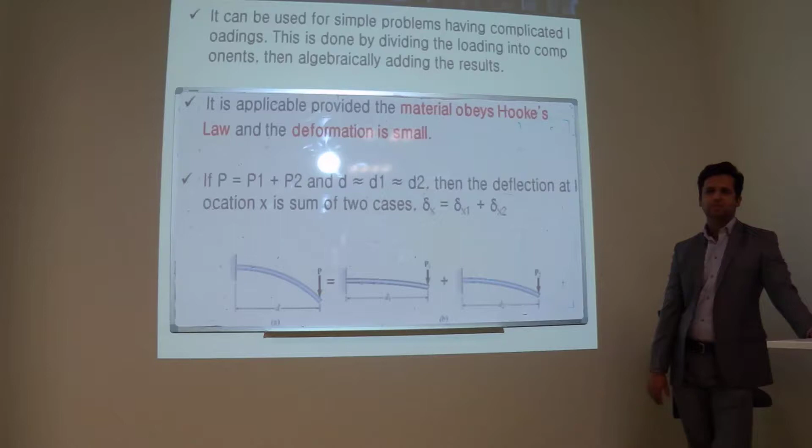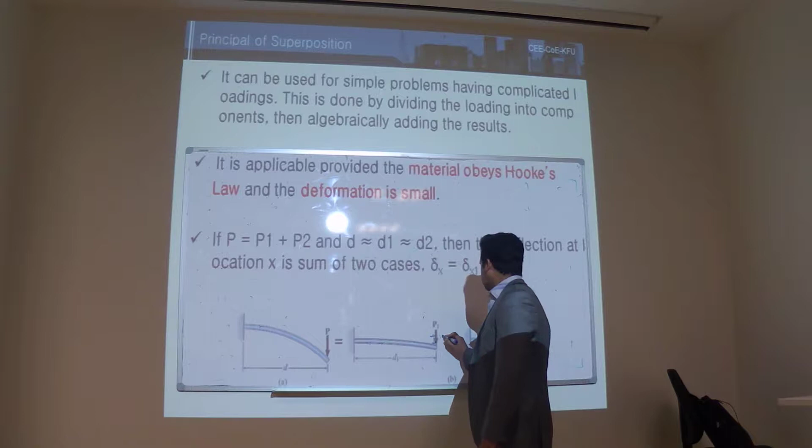For example, now we have a beam, and in this beam there is a load P1. Due to this P1 there is a deflection, and for example this deflection is like 10 mm. Due to this load P2, the deflection is more, like 20 mm.

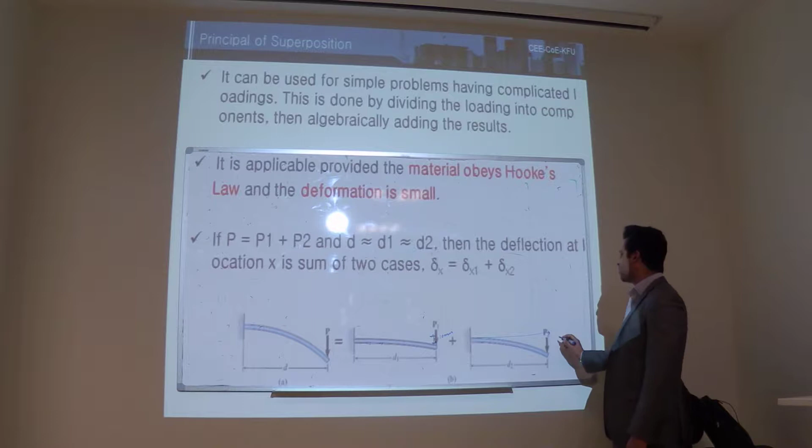So if we want to see the combined effect of these two loads, this load is 10 kilonewton and this load is 20 kilonewton. If you want to see the combined effect, what will be the deflection when P equals 30? According to the principle of superposition, you can add 10 plus 20, which gives 30 millimeter.

The same condition, everything is same. The beam length, span, all other parameters are constant. But for that, there are certain conditions that need to be satisfied.

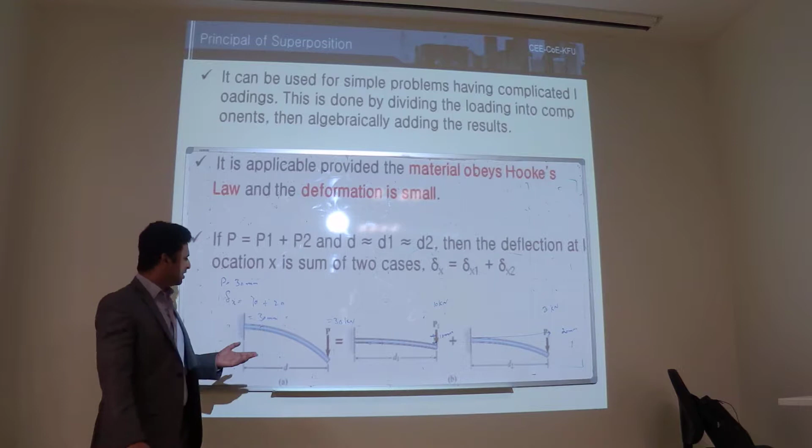For example, this material is an ideal material, like a rubber, like a spring. But in real life, we don't have ideal materials like concrete. You know that concrete is a non-homogeneous or heterogeneous material, so concrete does not obey any Hooke's law.

But what about steel? Does steel obey Hooke's law? Yes and no. In the elastic region, it does. Beyond that, it doesn't. You know that this curve is a stress strain curve for a steel rebar.

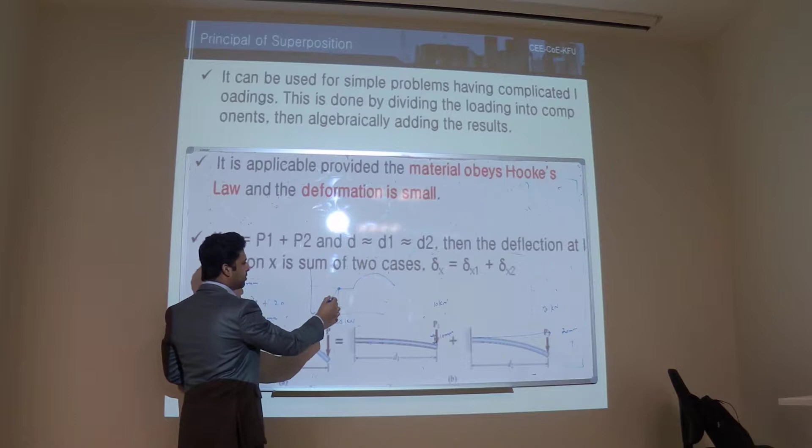Up to this point, if you apply any force or any stress up to this point, and then you remove it, it will go back. It is elastic. So it means that till this point you can use the principle of superposition for steel.

But what about beyond this point? If you apply some force and the stress has gone beyond this point, then its behavior is not elastic. It will not go back to the original shape. It will be deformed, and there will be some permanent or plastic deformation stored in the material. So for superposition to apply, the material should obey Hooke's law.

Luckily or unluckily, in your book there is no problem which discusses non-homogeneous or heterogeneous materials. So maybe you are both lucky and unlucky. That's why it is written in bold and in red that the material obeys Hooke's law and the deformation is small.

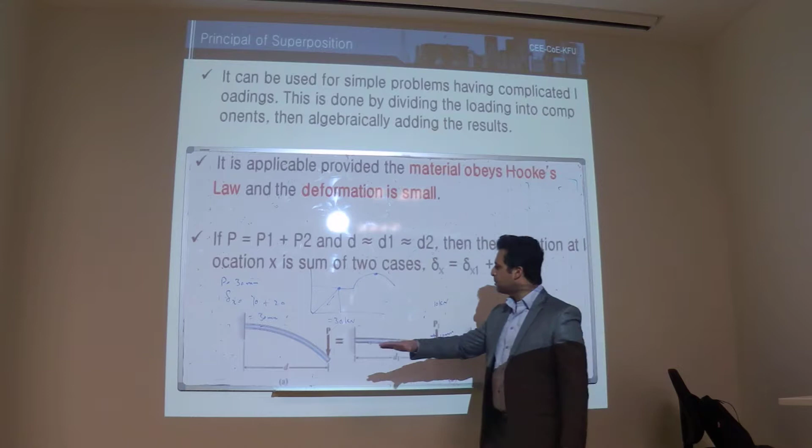If you want to see the combined effect of a load under the same conditions, you can add these two loads to get the total deformation, provided that the material obeys Hooke's law and the deformation is small.

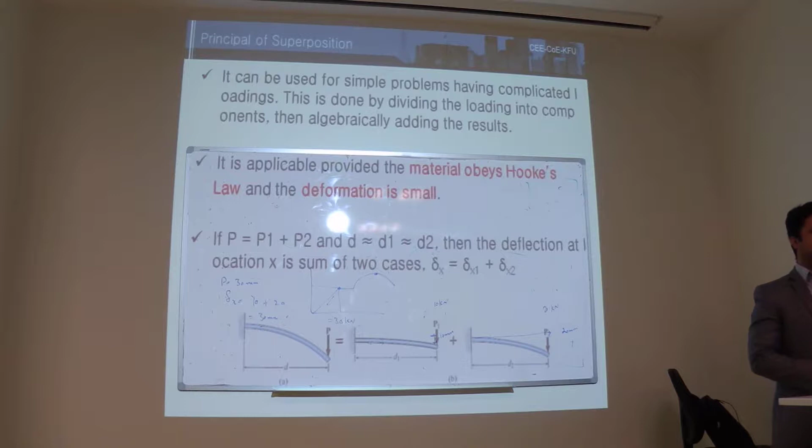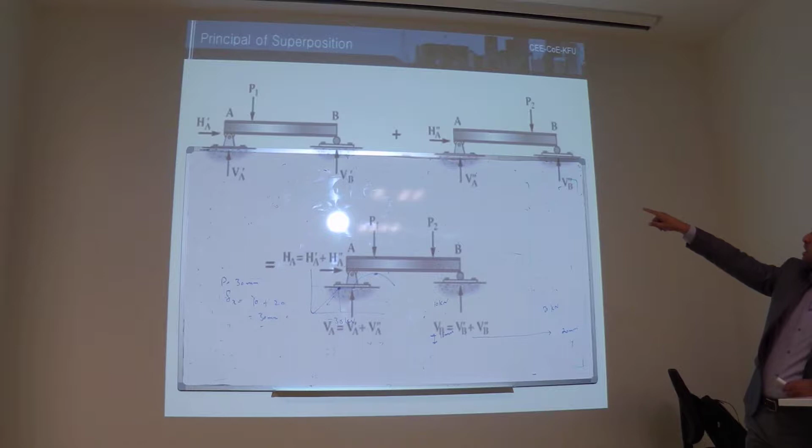The same thing applies in terms of support reactions. For example, if you have two beams, beam on the left and beam on the right, the reaction on the left side is VA prime, HA prime, and the reaction on the right side is VA double prime and HA double prime. If the material obeys Hooke's law and is homogeneous, the combined reaction under P1 and P2 will be the sum of these two. It's very simple.

Do you understand? You can do that with internal loadings too. Let me confuse you a little, am I allowed?

Is stress due to strain, or is strain due to stress? Strain is due to stress. It means that you apply some force and then there is strain.

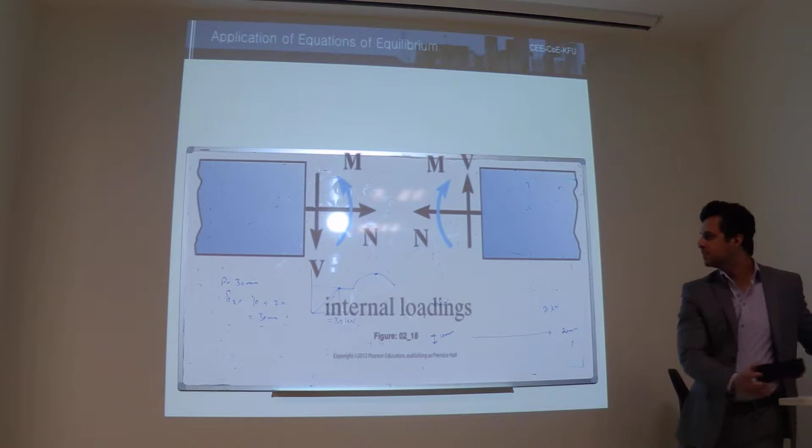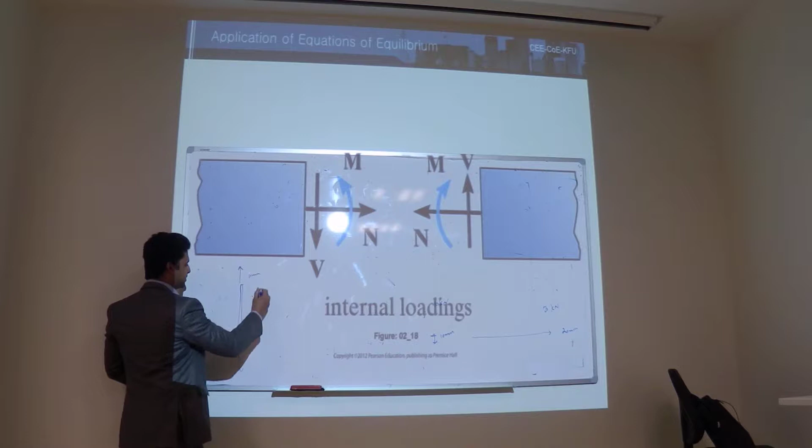Are you sure? Well, if we look at the graph... For example, there is a rebar. You don't apply force, you try to move this rebar 10 mm upward on both sides. So what will happen? It will extend, elongate, and its diameter will shorten.

But what is happening? I mean, do you need some force for that? Yes. So it means that if you apply some force, then there will be some deformation.

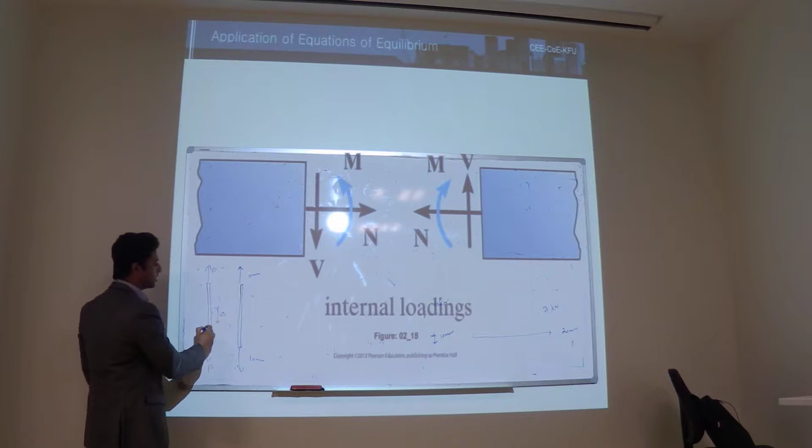So which comes first? Both. You know the stress strain curve you have plotted, maybe in strength of materials or mechanics of solids. One, you apply deformation, and to give that deformation, you need some force. And where is that force coming from, and how much is it? From the stress multiplied by the area.

When you pull any material, what is happening? You are giving deformation, you are not applying force directly. So the material itself tries to resist, and that resistance is known as what?

What is stress? What is the difference between stress and pressure? Area. What is stress? Definition of stress: force over area. And what is the definition of pressure? Same. Then what is the difference? The pressure depends on the area, and the stress depends upon... No. Pressure is a type of stress.

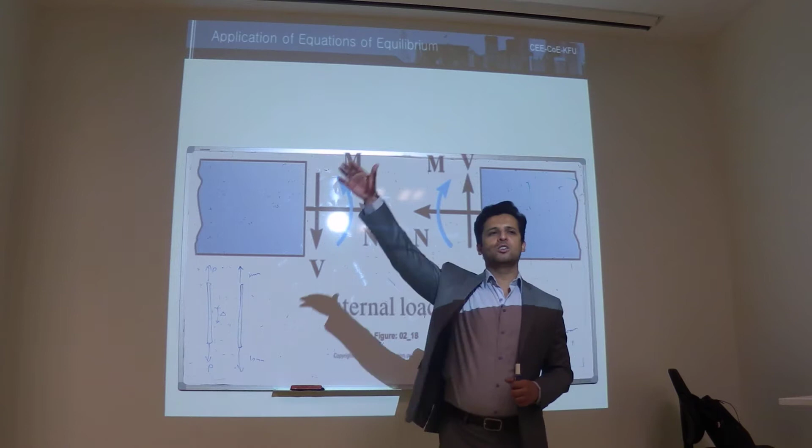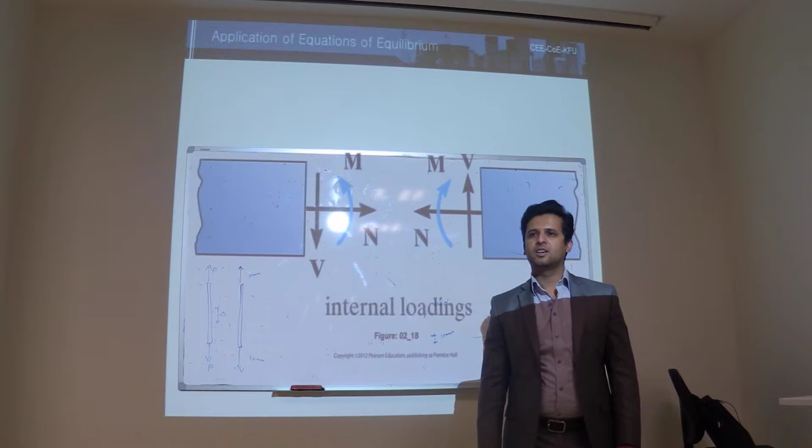For example, someone of you is standing here. I put a load on his head, like 10 kg. So the 10 kg is the applied force. And you are also trying to resist that force upward. That is your resistance. And that is how much? 10 kg upward. Okay? And then I put 20 kg. You will do more, 20 kg. And if I put 100 kg, you're crushed.

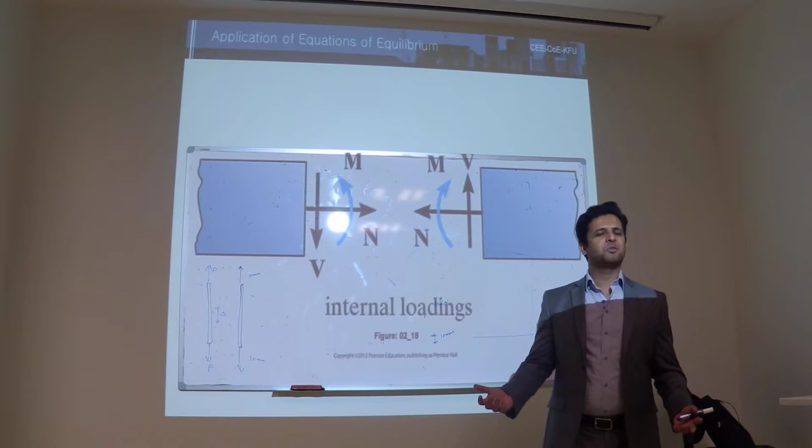Depends on you. You will fall down. I think it's very hard for an average person like me to lift 100 kg. It's very hard, of course. So it means your resistance has gone. So that is the point when stress becomes zero. But the external force is there.

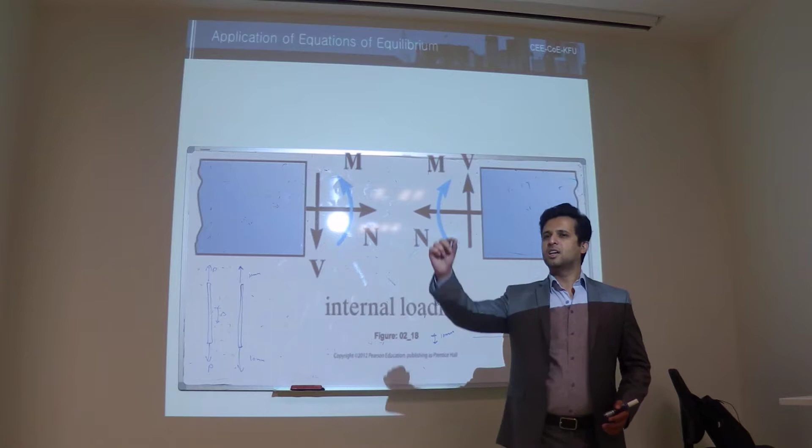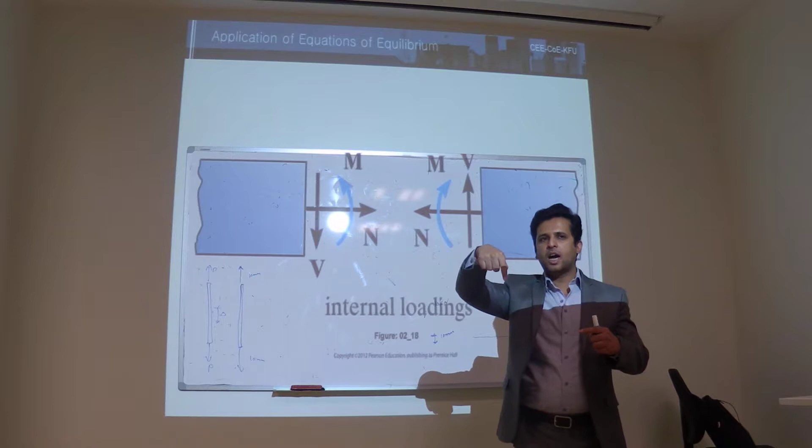The same thing is happening in the structure. When the structure cracks or breaks, you apply some force and the beam breaks down. It means that the internal resistance has gone. Internal stress has gone. Okay? For example, if you see this slide, there is a beam, you apply a force, and due to this force there will be a bending moment here. You know that there will be bending here?

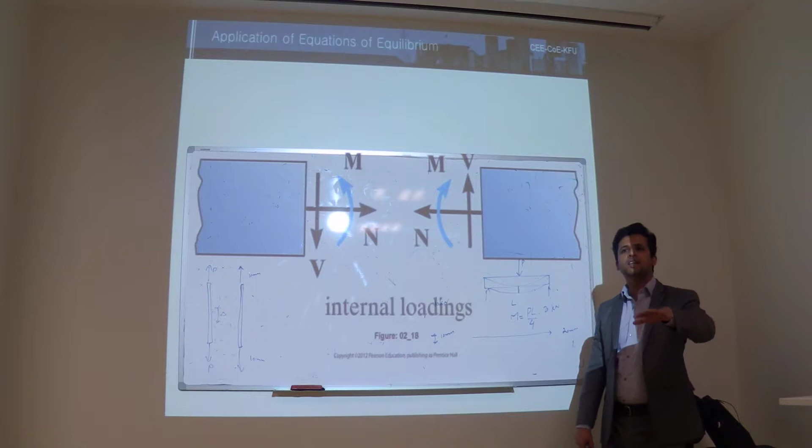So you have two forces. One is the bending here. If L is the length of the beam, how much will be the moment? PL over 4. If L is the total length and the load is in the middle, then this moment is PL over 4. That is the applied moment. And how much is the resistance? Equal, but in the opposite direction. The beam is trying to resist. But if you increase the load greater than the resistance, then it will fail, it will bend.

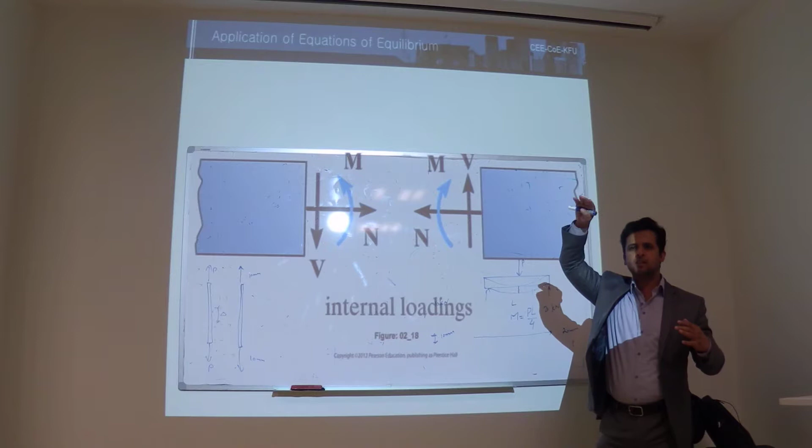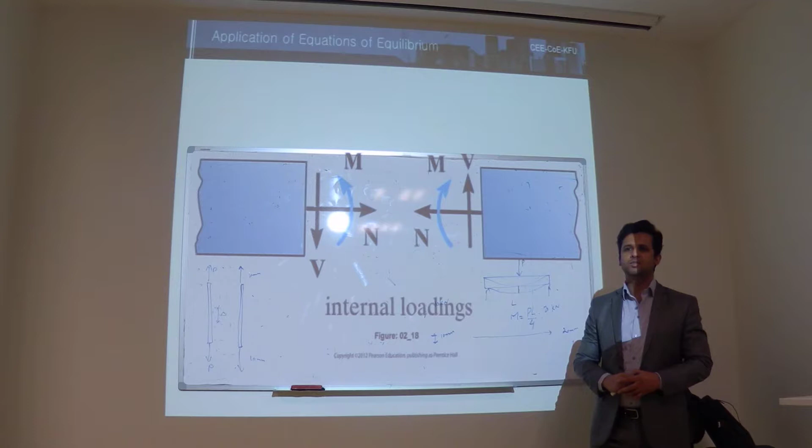The same thing is here. So there is an internal moment. How to calculate that internal moment? Do you know? For steel, you know that. I hope you know that, and you have studied it in strength of materials. You know what is the meaning of strength of materials? This is what I'm saying. Internal. You know this equation?

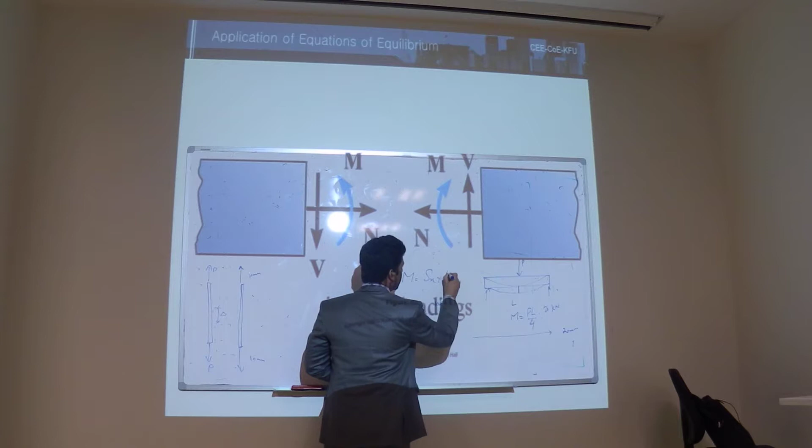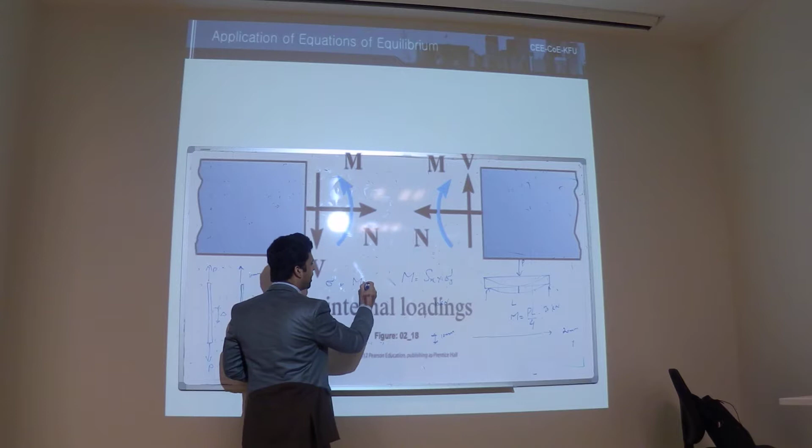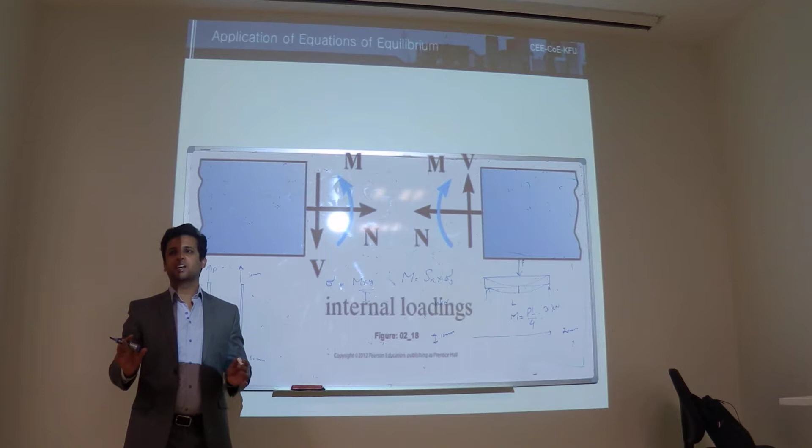M is equal to Sx into sigma y, or sigma? I think you should know this equation. M is equal to, or the bending stress sigma is equal to M into y over I. No. You are lying to me. We know just M equals 0. You have not studied this? No, we reached chapter 4 and 6. If you're saying this, you're lying, because it is the most important equation in the history of structural engineering. Sigma is equal to M into C over I, maybe.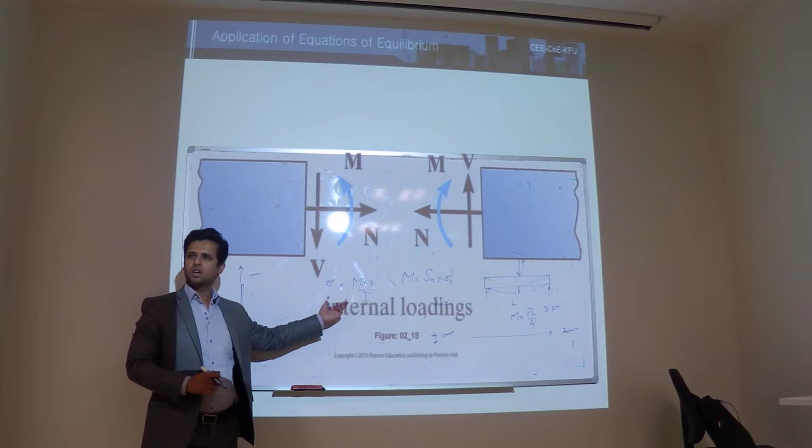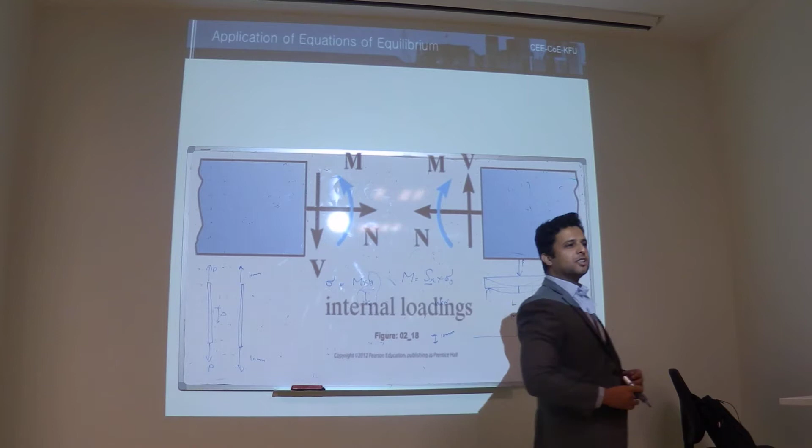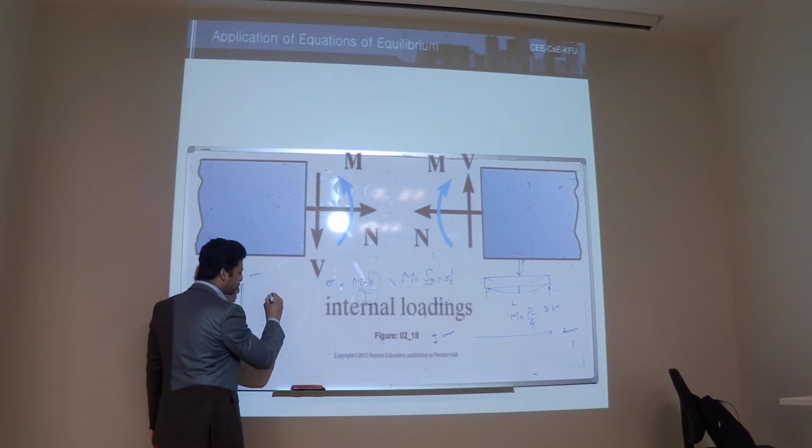Okay, but this equation gives you the bending stress. And what is I over y? I over y is basically Sx, the same equation. Or you can say Ix. I will complain to your teacher. So this is the internal resistance. Okay? In the same way, we have studied the equation for how to calculate the shear stress. What is the equation for shear stress? It's shear force over the area.

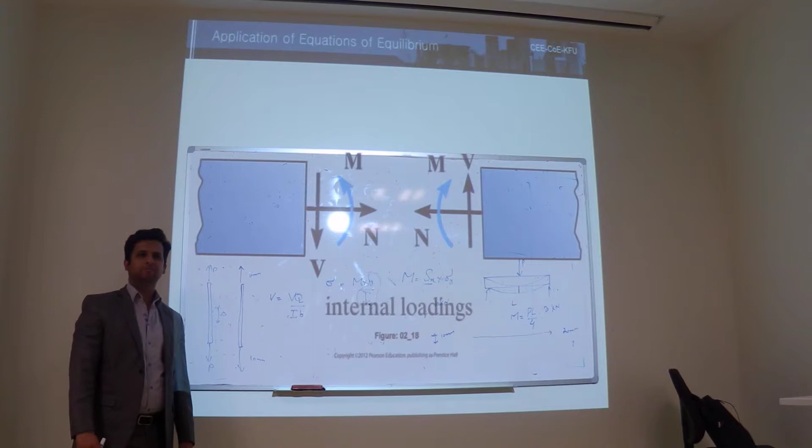VQ over IB. No? What about the torsion? How to calculate the torsional stress? T into R over J.

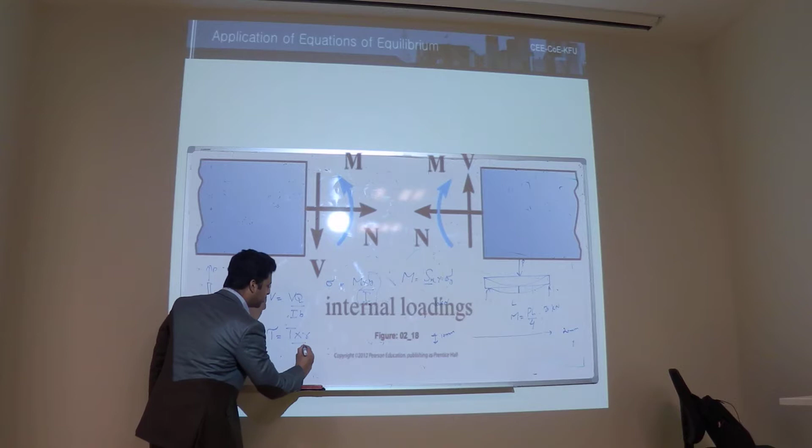No, great. You are in my class, and you are gonna be engineers someday. In the far future. Not so. Well, I'm a little bit surprised, but I don't waste your time.

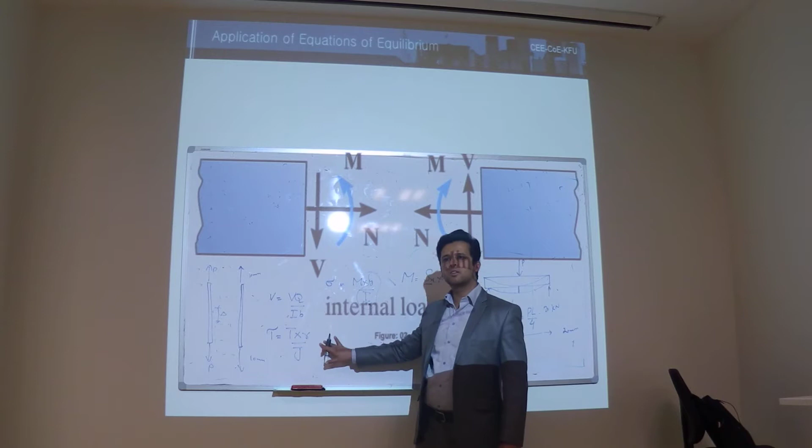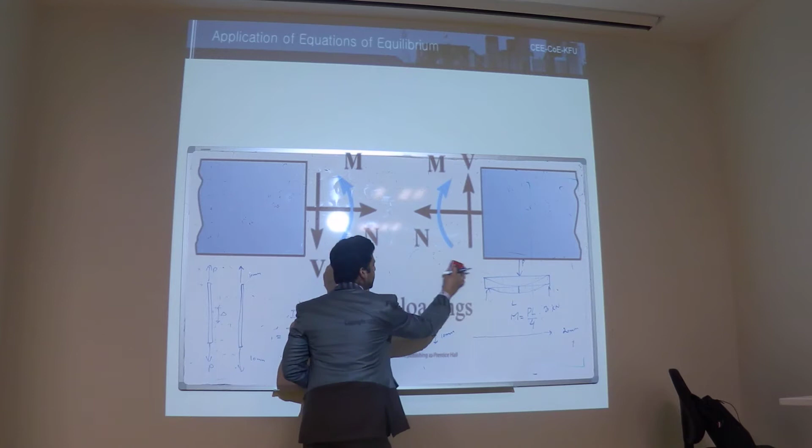Okay, but these are the equations. These equations give you internal forces, internal resistance. This is internal shear. This is the internal moment capacity. For example, for reinforced concrete design, maybe around 5 weeks I take just to teach how to calculate the internal resistance of a concrete beam.

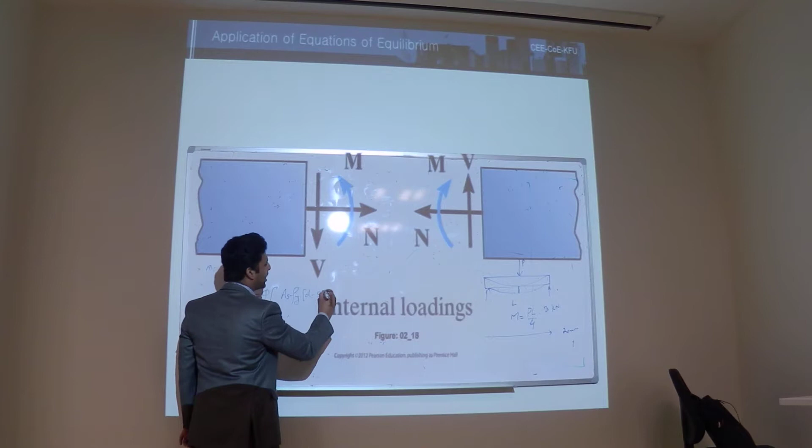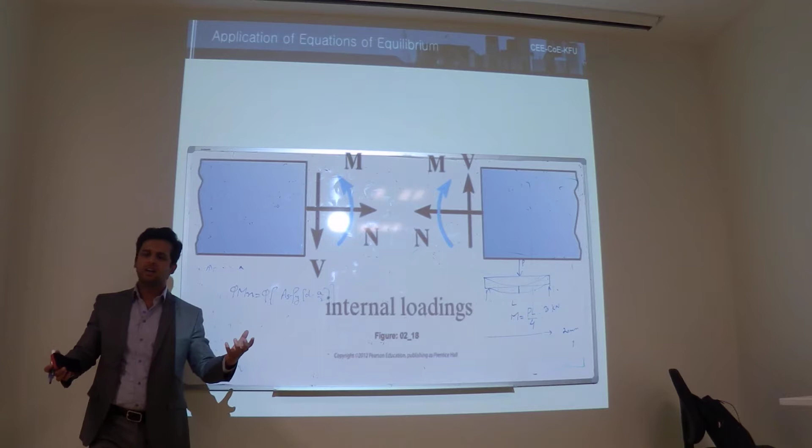The equation is this. This you don't know because it is reinforced concrete design. Half of the semester I take just to tell the capacities of different beams. Okay? Because you know, analysis and design, they are parallel. What is design? I told you, to find out the required sizes. For equilibrium, the applied forces and the resistive forces should be equal.

Do you understand? Which structure will be an economical structure? If the load is like half or less of the resistance. Economical will be that one in which the maximum expected resistance is equal to the maximum possible applied load. Okay, that's MU. If you want to find out the capacity, this is the equation. What is design? Design means to find out the required size or the reinforcement in case of concrete beam.

This is if you know the maximum moment, you can find AS, the area of steel, and if you have AS, you can find out the maximum moment. So this is the same, capacity and design, they are parallel. If you know the size, you can find out the capacity. This is known as capacity analysis. And if you know the required force, you can find out how much should be the size.

If you understand, very good. But if you do not understand, still you can pass this course. Okay? With A grade or maybe A plus.

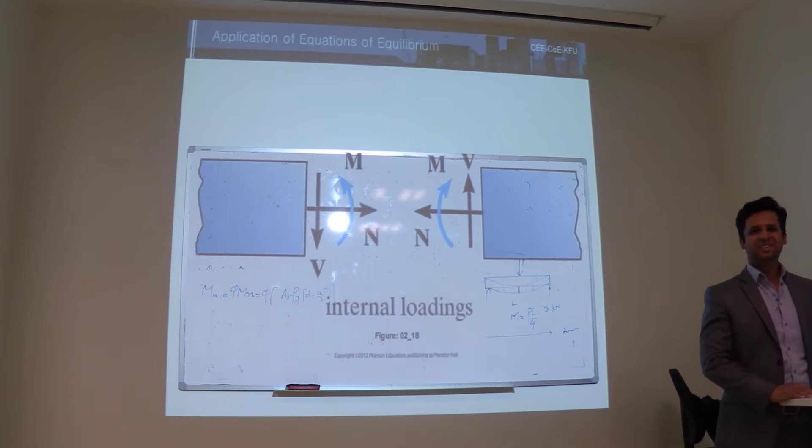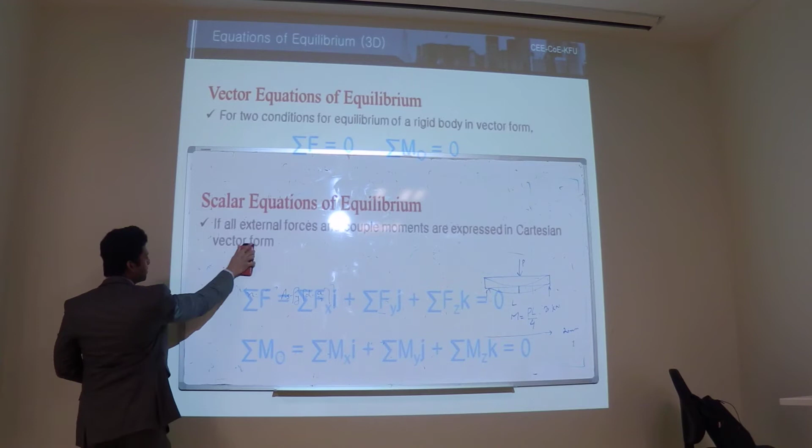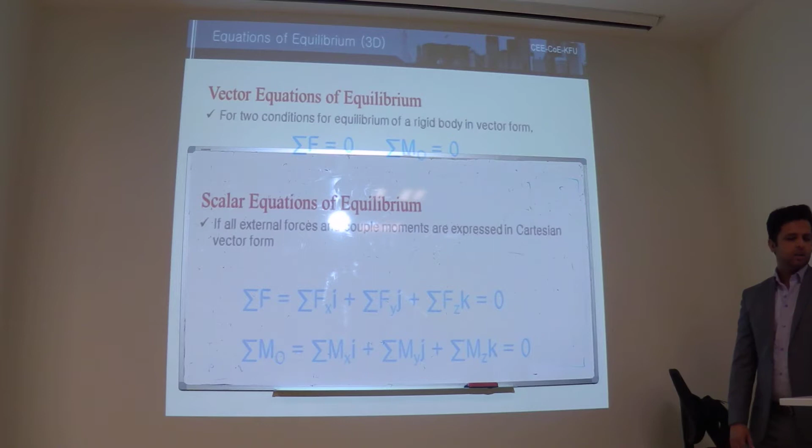Okay. These are the equations of equilibrium. So you know that it is three-dimensional equilibrium. And for a two-dimensional equilibrium, the sum of all forces should be equal to 0 and sum of all moments should be equal to 0. Okay? Let's come to the point of concern. Next is degree of determinacy and degree of stability.

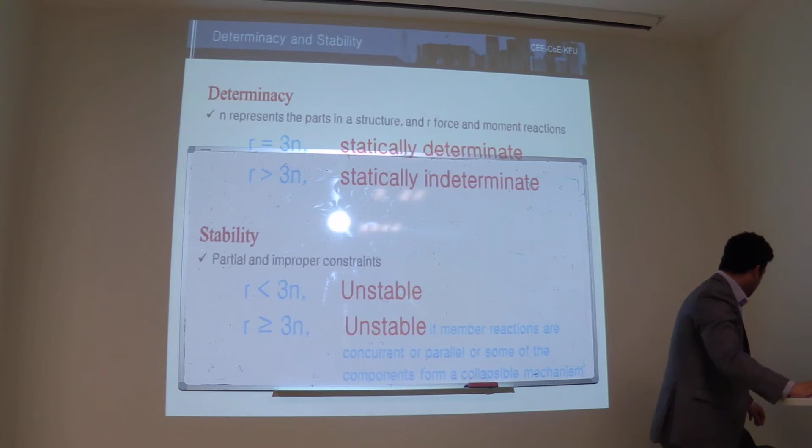There are two things, or in fact 4 things. Determinate. Okay, I think you have solved many problems in your statics. Let me change the marker. It's determinate when there are enough equations to find all the variables. If not, that structure is indeterminate.

For example, it is a hinge support, and you have one force like this, 10 kilonewton at 45 degree, 2 meters from here and 4 meters from here. How much will be the reactions? We'll take the Fx, Fy, we'll take the vertical and moment. First the vertical. There are 4 reactions. Like if I call this A and I call this B.

Just take the moment. If you take moment here or here, these two you can find. If we take the moment at B, we will get the vertical. If you take the moment here, you will find this only. And if you take moment here, you will change VB. You will find this. Okay. And the other equation is

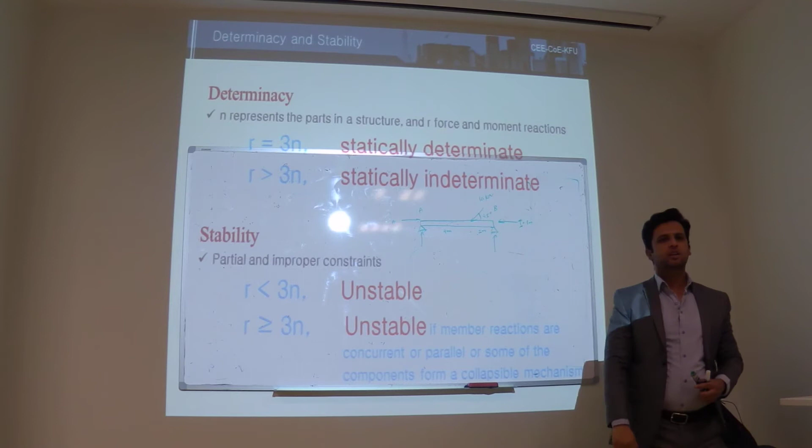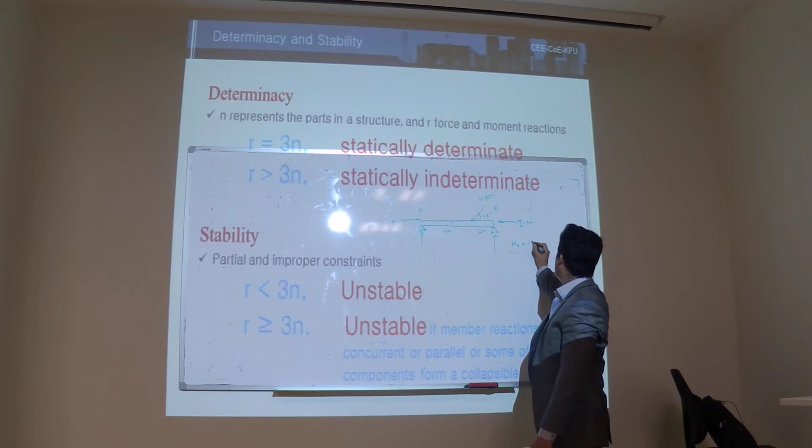By the sigma fx. Okay, I take sigma fx. HA plus HB is equal to 10 cos 45. Yes. How to find HA and how to find HB? This is an indeterminate structure. And how much is the degree of indeterminacy? We have two variables.

So, how many supports do we have? Two supports. How many reactions do we have? Four. And how many equations do we have? 3. Sigma fx, sigma fy, and sigma m. So how much is the degree of indeterminacy? 1. I mean, if we find one more reaction, we can solve it.

So any structure, for example, if I convert this to a roller, we have 3 equations, 3 reactions. Now you know HA is equal to 0. And now you have 3 equations and 3 unknowns. Okay? So now this structure is what? It is determinate. What about this structure?

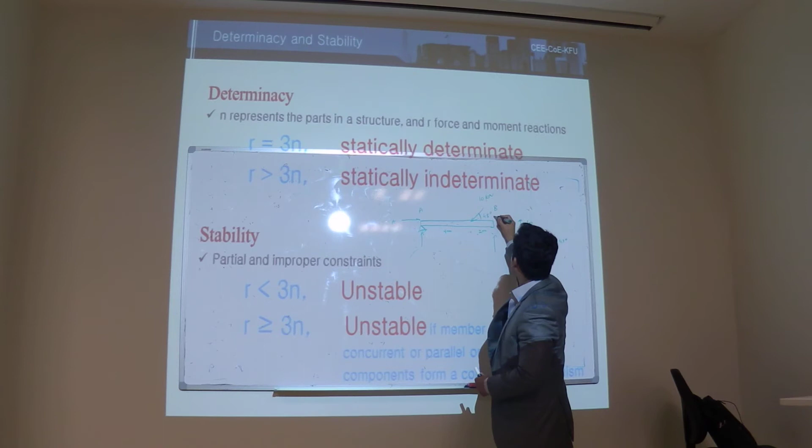Indeterminate. There is a 5. And how much is the degree of indeterminacy? 2. And if I make a fixed support here, 3. This is the degree of determinacy and indeterminacy.

Now let me tell you about stability. I think I told you something about stability. Okay, the same structure, but I put a roller here and I put a roller here. Can be pushed.

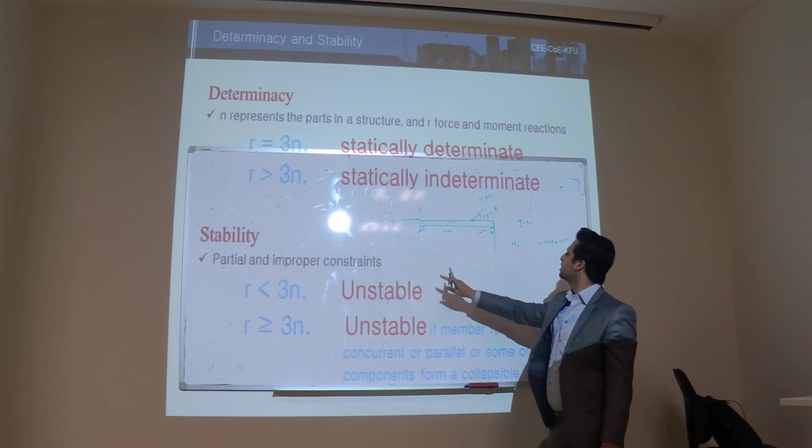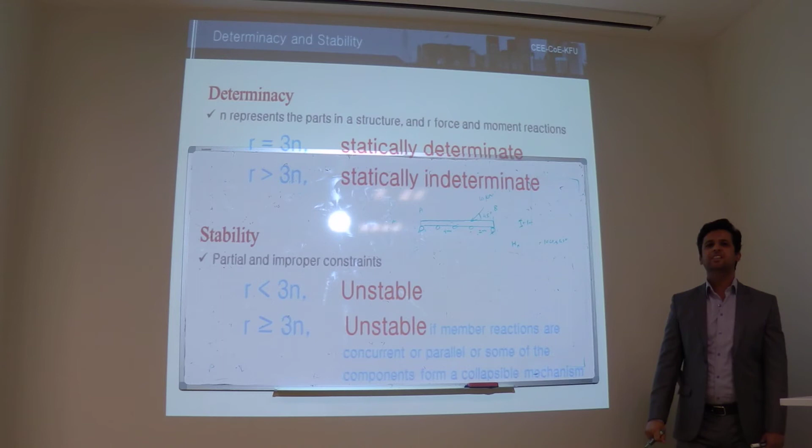So now this structure is what? Is this structure determinate or not? Determinate, but unstable. And if I put 3 more rollers, it is indeterminate and unstable. Do you understand now?

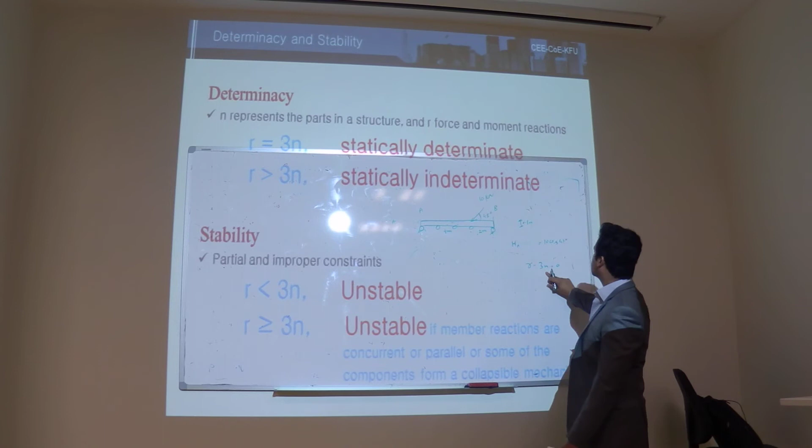Good. Now I tell you how you can calculate by this equation. There is one equation, R is equal to 3n. Or if R minus 3n is equal to 0, it means your structure is statically determinate. We don't know about stability or not, but it is statically determinate.

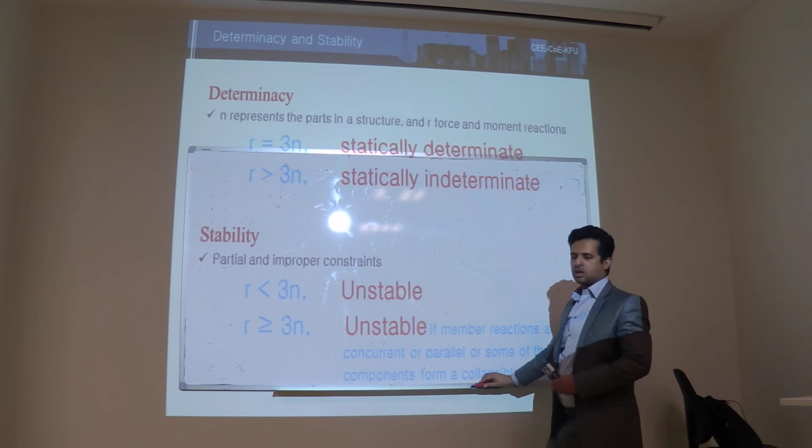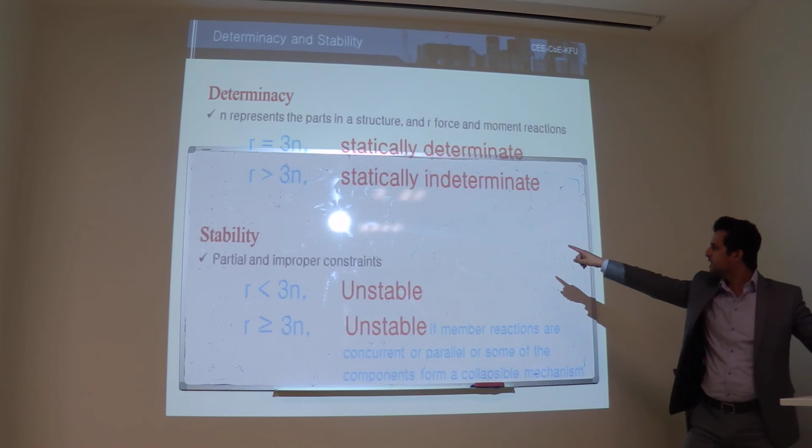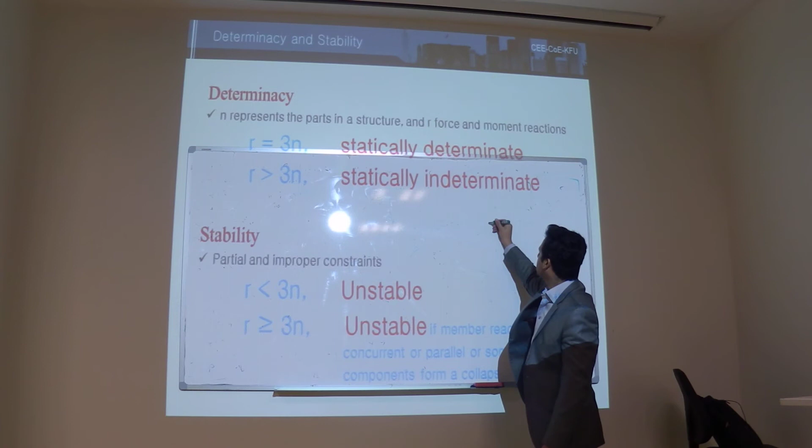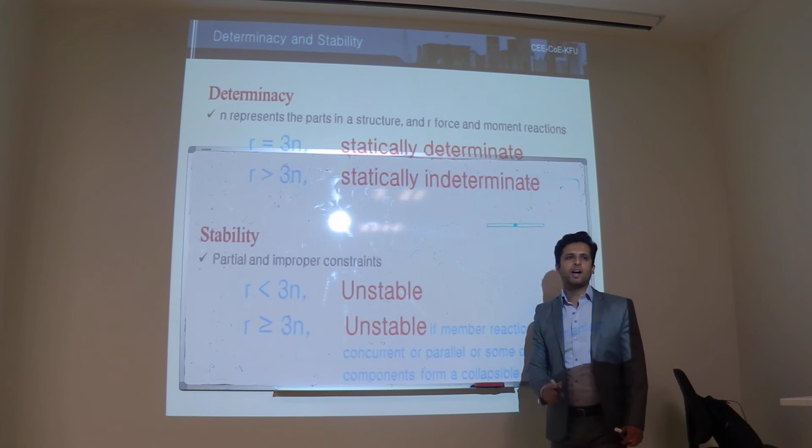So let me tell you, there is also one condition. What is n? n is the number of members, number of parts. For example, in this case there was one beam, so n is equal to 1. If there is a member which has a joint, it will become 2 parts. For example, this beam is in 1 part, but if I put a joint here, it will become 2 parts. Now n is equal to 2. Okay? So let's solve some problems.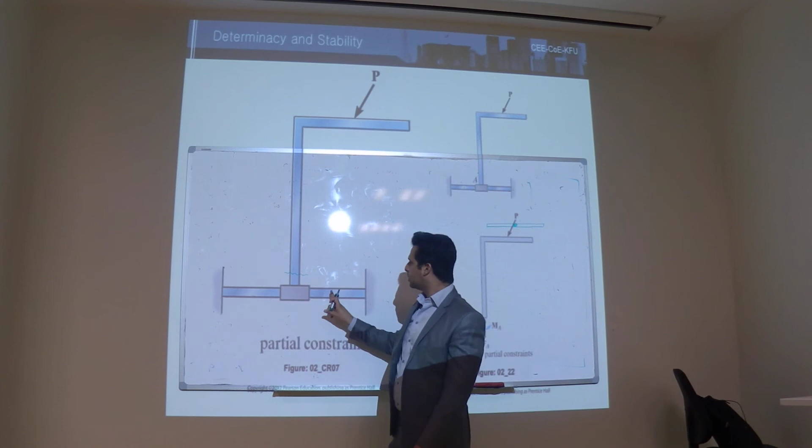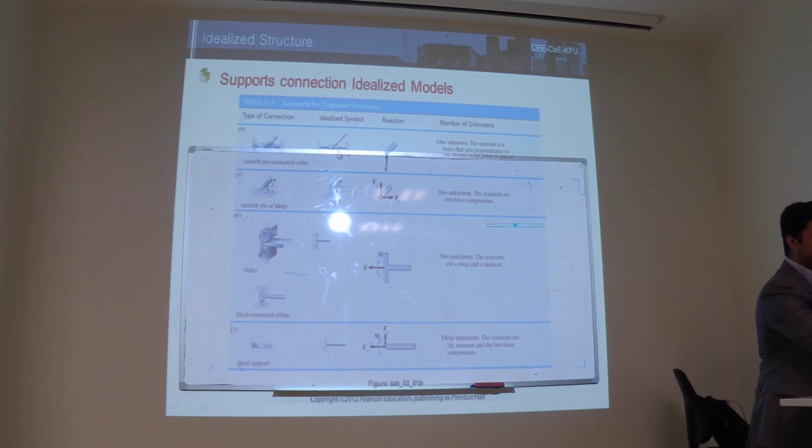Let me tell you one more thing. This support is a collar. I mean, don't consider this as a member. It is a support. It's a collar support. I think I have shown you before. Like this. This is a collar. See this support. This is a collar. Can you see here? This support.

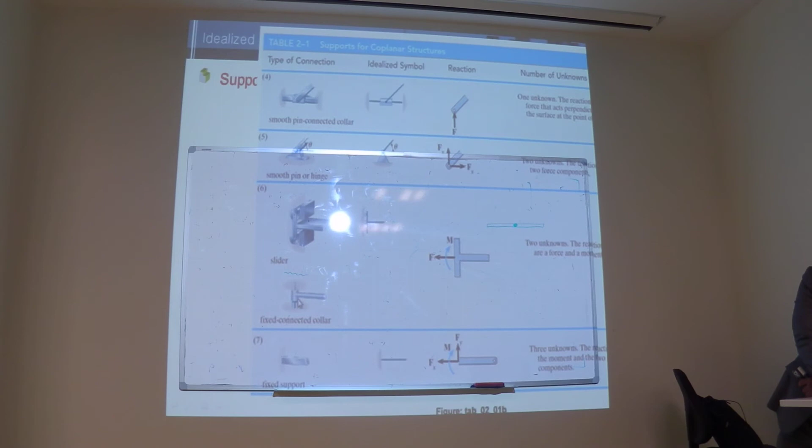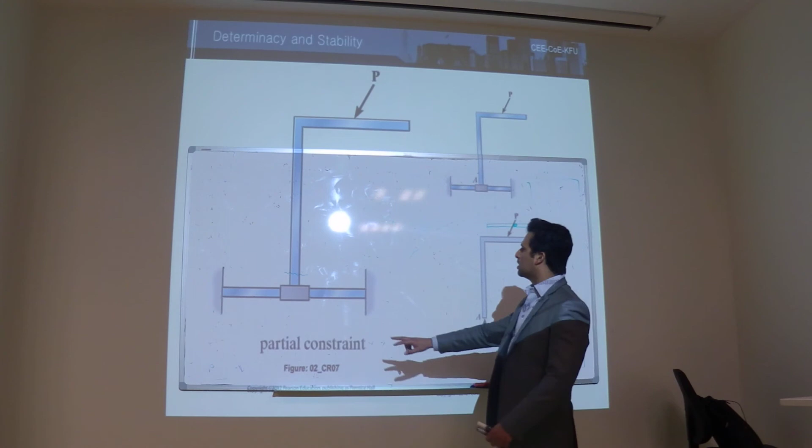If you see this one, this is not a member. This is also not a member. This is a part of support. This type of support is known as, we call it collar, C-O-L-L-A-R, collar support. The same is here. Fixed connected collar. So I'm saying that if you solve any problem, don't consider this as a member. This is a part of support.

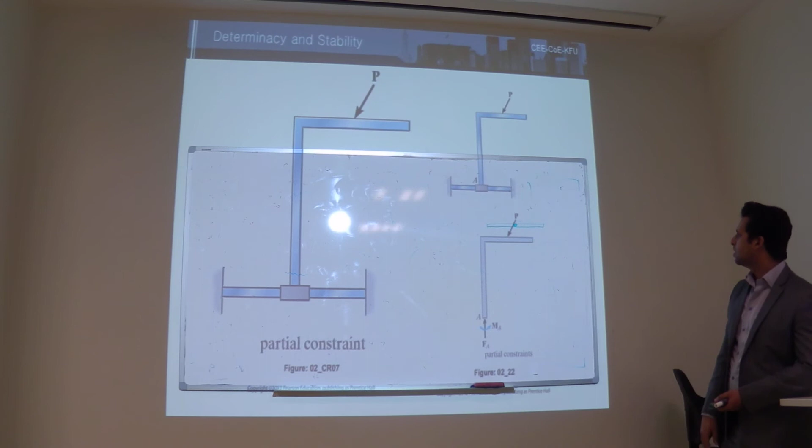So how many parts for this structure? 1, 2, 3. 3 is support. We have a beam. Not considered. Okay, hold on.

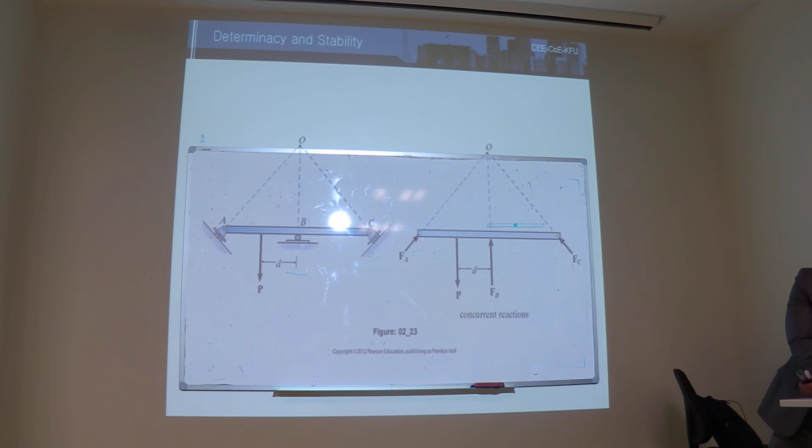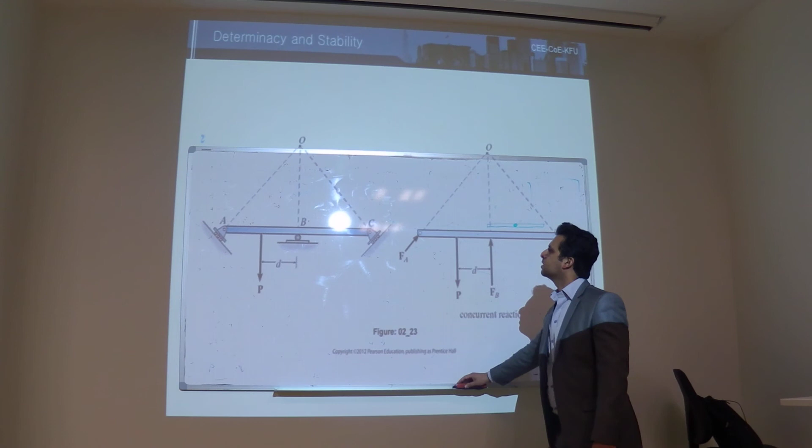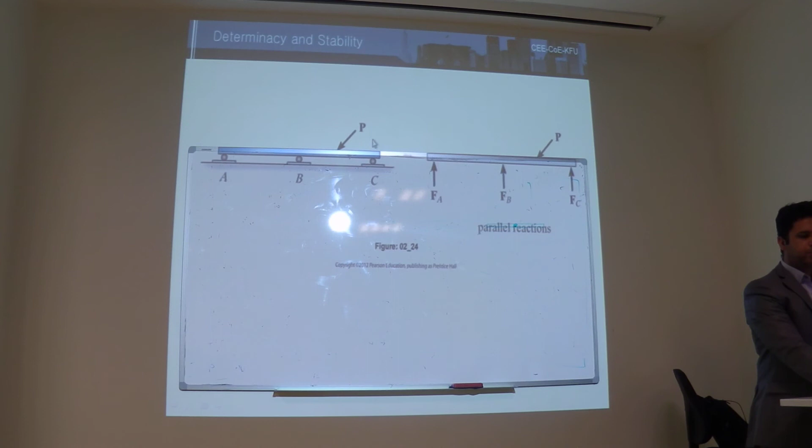I will tell you, there is one more condition. If that condition is satisfied, the structure will be unstable, and this is the condition. If you have supports in such a way that the resultant of all these forces is passing through one point, then that structure will also be unstable. It will not be stable. For example, this is the example I have given you just some time before. This structure is determinate but unstable. Now let's solve some problems.

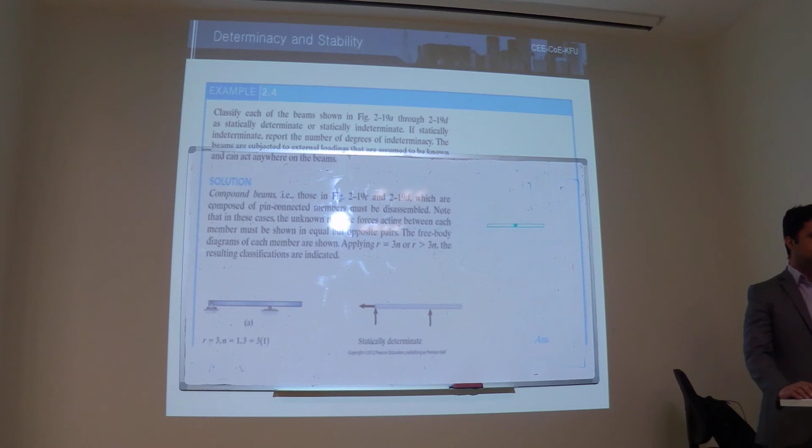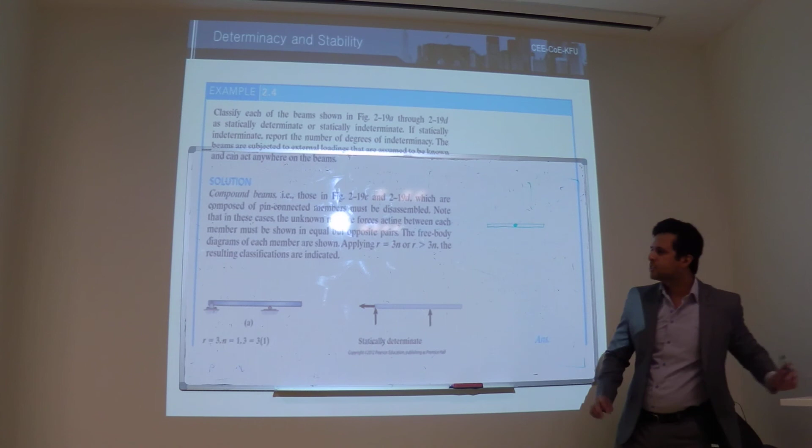You will get the answer in this problem, okay? Now for this problem we have to calculate what? We have to tell whether this beam is statically determinate or not. The simple rule is R minus 3n is equal to 0, or R is equal to 3n. If they are equal, it means it is statically determinate.

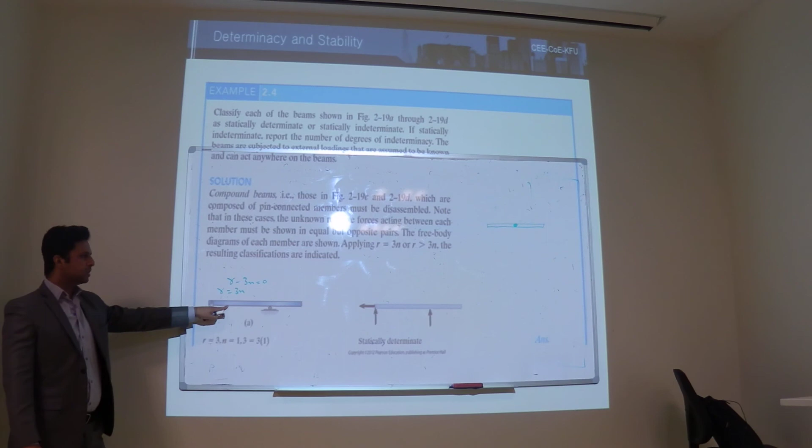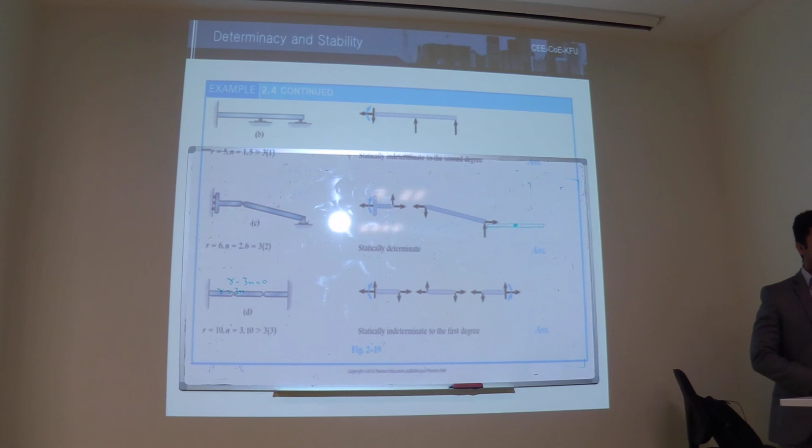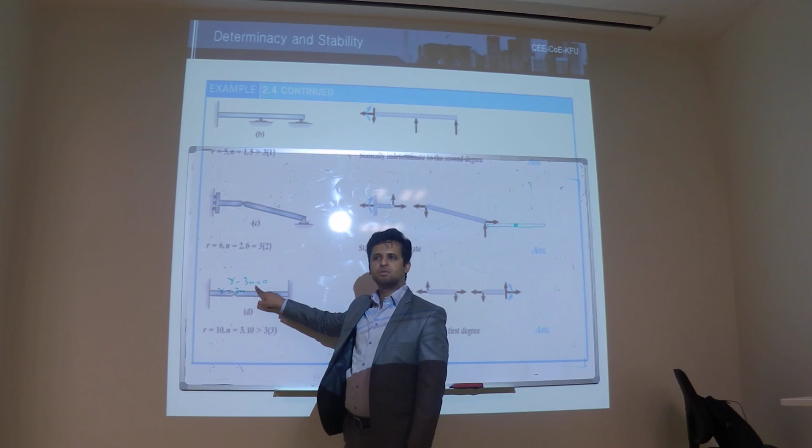So now you can tell me about this structure. n is the number of members. How many members? 1. And how many reactions? 3. R is the number of reactions. Now let's talk about these structures. For example, see the topmost one, B. How many reactions? 5, 3 and 2. And how many members? 1. So 5 minus 3n, 5 minus 3. So the degree of indeterminacy is 2.

Now let's see about C. Please see. Any question? No? Okay, now if you talk about C, how many parts? How much is n? 2. And how many reactions? 3, 5, 6. Roller, 6.

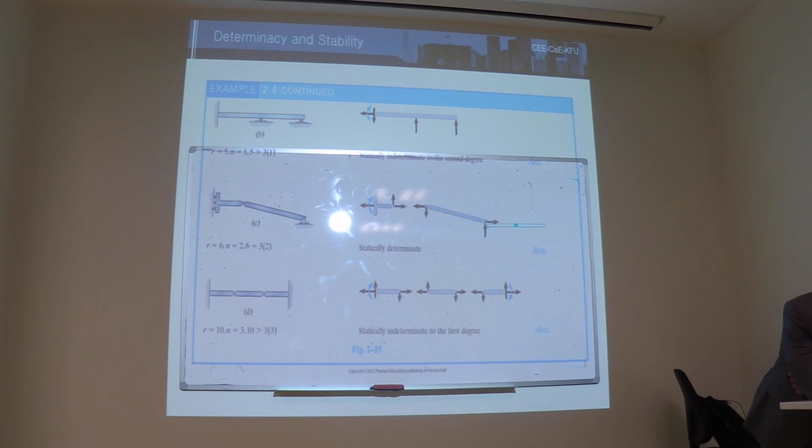You know what I can see? I can see there's a mistake here. He has put a